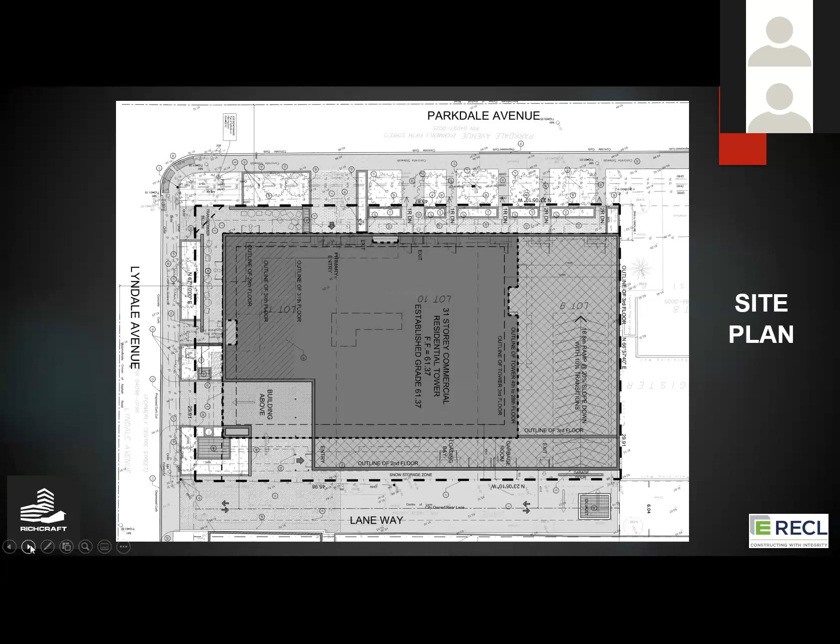So this is a picture of the site plan of the project. The laneway, the city laneway that's adjacent to the site between our site office on Lyndale and the project itself will serve as the access road into the project, into the parking garage access ramp and the 31-story tower. You can see the ramp, the retail spaces at the corner of Parkdale and Lyndale when I get to the ground floor plan.

There's the main lobby. There's also a lobby entrance off of Lyndale. There are some townhome units on the ground floor facing Parkdale. A relatively small footprint, but you can see the basic layout of the building.

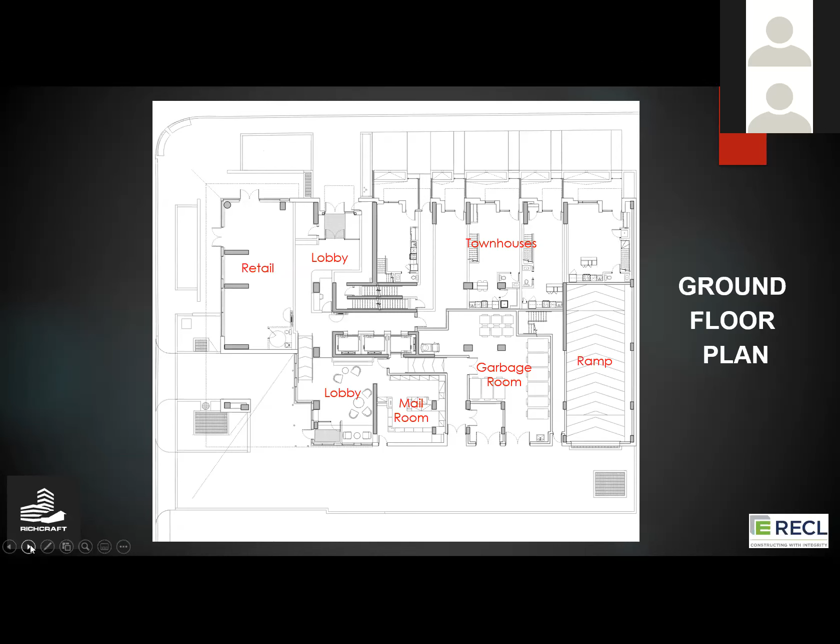We get to a typical floor. It's a mix of 1 and 2 bedroom units. Pretty typical layout, floor after floor as we go up through the building.

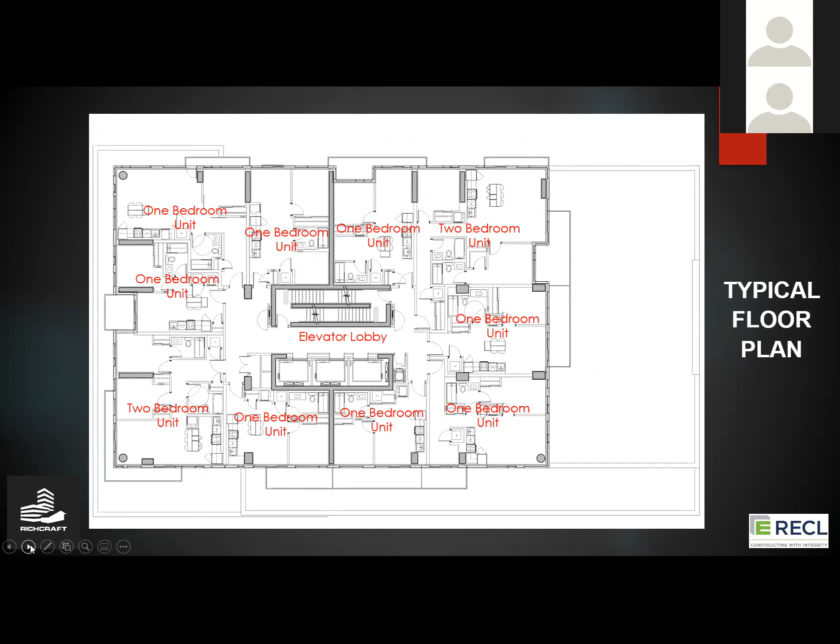These are the elevations of the building. Again, like I said, it's a relatively small footprint. I think it's a reasonably elegant looking building that'll blend well into the neighborhood.

So again, this PowerPoint presentation will be available through the councillor's office or directly from us for anybody who would like to have it on an ongoing basis. We'll be providing information on what we're building.

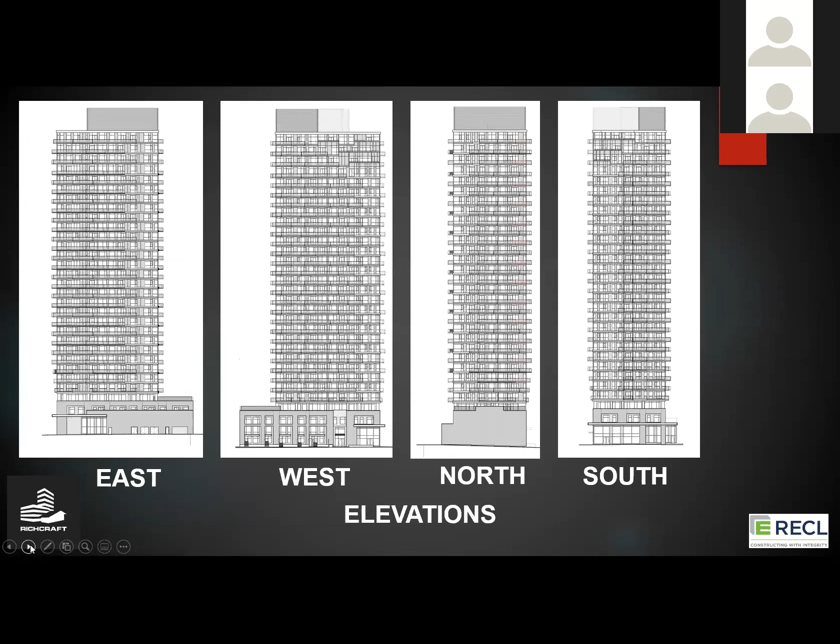Now, I want to deal with, because I think most importantly to most people here, is what's going to happen while we're building and what does construction look like.

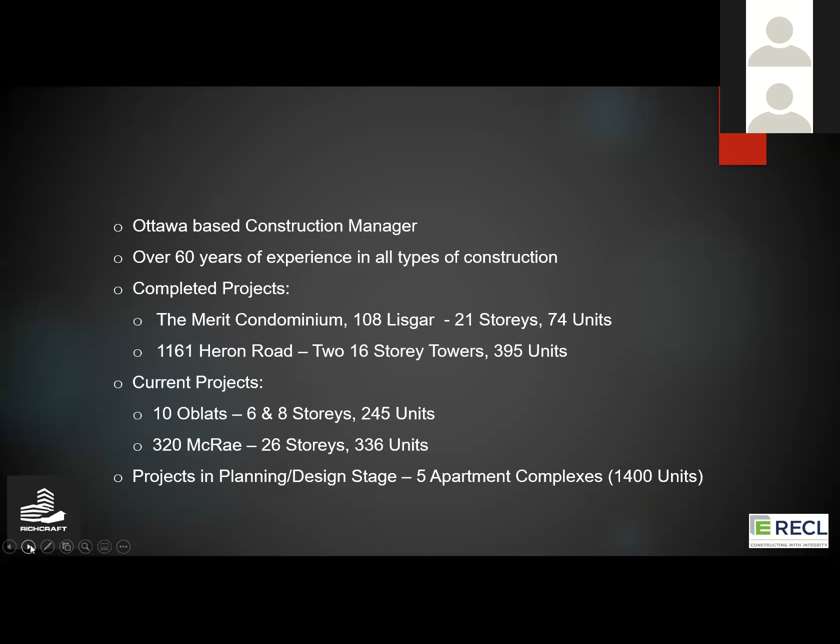First off, I just want to introduce our company, Ron Eastern Construction. We go by the acronym RECL. We were formerly Ron Engineering and Construction Eastern, so many people might know us as Ron Engineering. We rebranded in 2014. We're an Ottawa-based company, we only work in the Ottawa area now. Founded in 1958, 60 years of experience.

In the last period of time, we've developed a significant portfolio of residential high-rise projects. Starting earlier, from 2011 to 2013 we built, for Charlesford, the Merit Condominium on Lisgar. And we recently just finished 1161 Heron Road, which is 2 16-story towers, 395 units across from Canadian Tire at Heron and Bank. Ron and Bruce were both on that project and have come over to do this one.

Some of you in the neighborhood would also see us down the street across from Farm Boy at McRae and Scott. We've just started construction on a 336 unit, 26-story building with a 4-story podium and townhouse levels. We're in excavation mode there.

On Main Street at Oblats, we're building 6 and 8-story buildings for the regional group, 245 units. The first building will be ready for occupancy in November and the second one in April.

On top of what we're actively doing and what we've recently finished, we have 5 more buildings in planning and development stages, 1,400 total units. We anticipate that all of those units will be under construction by December of 2022.

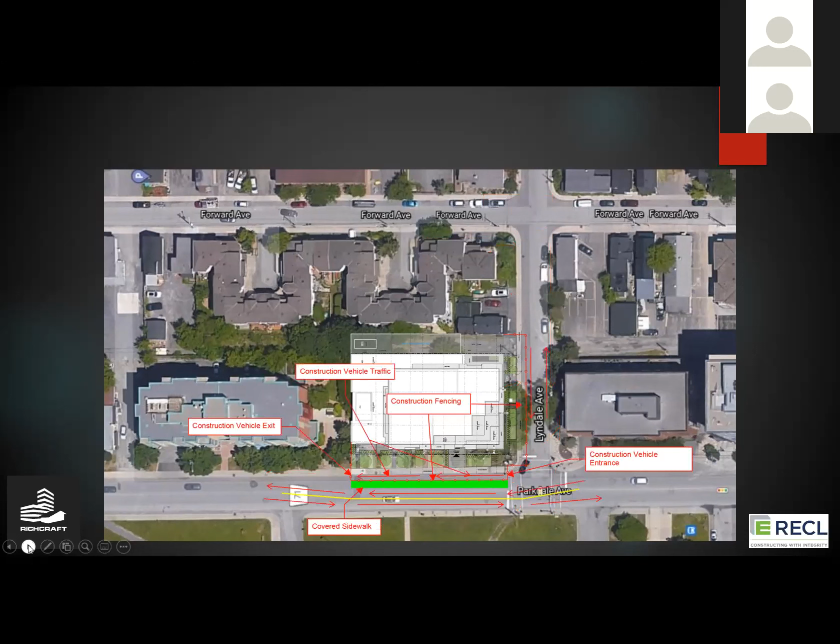So now we have the plan for when we are doing the shoring and excavation, the rock excavation, the blasting operation that we spoke about.

There is very little shoring required because the surface of the rock is so close to the surface. We are going to have a couple of dips and dives where we'll need it, but none of this will mean we need tiebacks onto private property. This will all be done by drilling and coring and placing piles, so we will prevent any use onto private property.

During the excavation through the site, you can see here I've labeled the construction vehicle entrance and exit. Through both of those are areas where I feel we're going to need a crossing guard, just because people and construction vehicles don't mix well together. So we need somebody out there to look after the pedestrians.

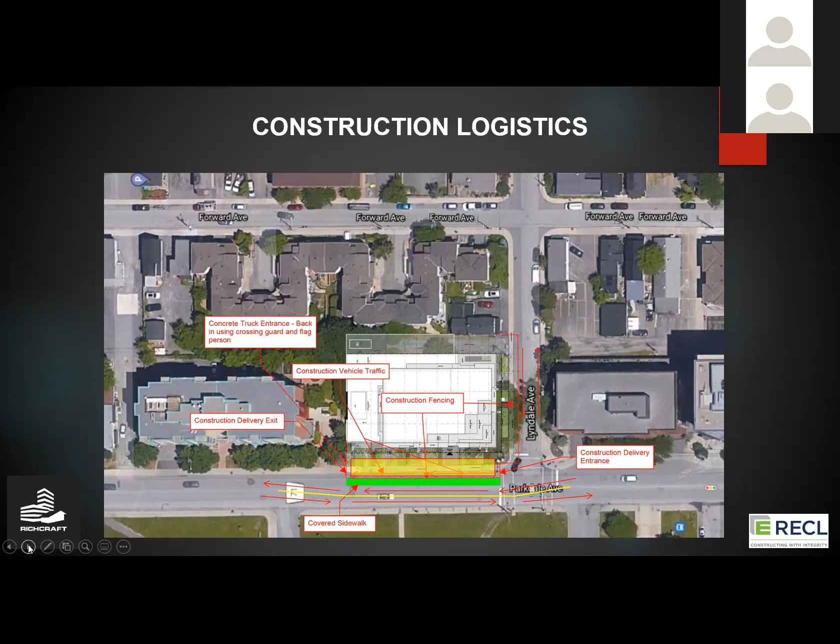Bruce, if you have anything to add, but nope, otherwise I think that's it. So we move to the next phase, which is after the excavation's done and we start a concrete operation.

Concrete operations can be very intense, especially when you've got a pour going on. The trucks are one right after another, the concrete trucks, they have to get in and out. Unfortunately, we cannot at that time do a drive-through site, because we will also have a concrete pump set up somewhere in that yellow shaded area.

At that time, we will be bringing the concrete trucks north on Parkdale and backing them in from the north side to the concrete pump. Again, very important that we have the proper signalmen and flagmen there to protect pedestrians and to stop vehicles when there are pedestrians around. So except for on pour days, we will still have a drive-through site.

That's very important to try and keep as much traffic as we can driving through. It's very dangerous on a construction site with vehicles backing up. So again, construction deliveries will be scheduled. We do not want to have construction delivery vehicles lining up down the street.

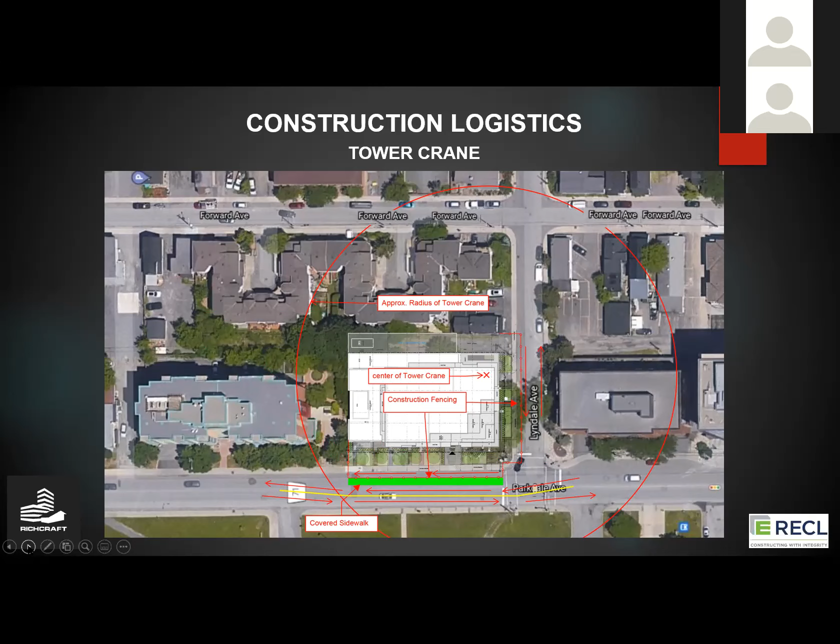I don't think I have anything else. I'm sure there's many questions. So, we arrive at that point. That was a brief walk through the logistics of construction, the team, the game plan, what we're building, and the timelines. The group as a whole here, the Richcraft people as well as our RECL people, are here to answer questions from the community. So Fiona, I'll turn it back to you to moderate those questions.

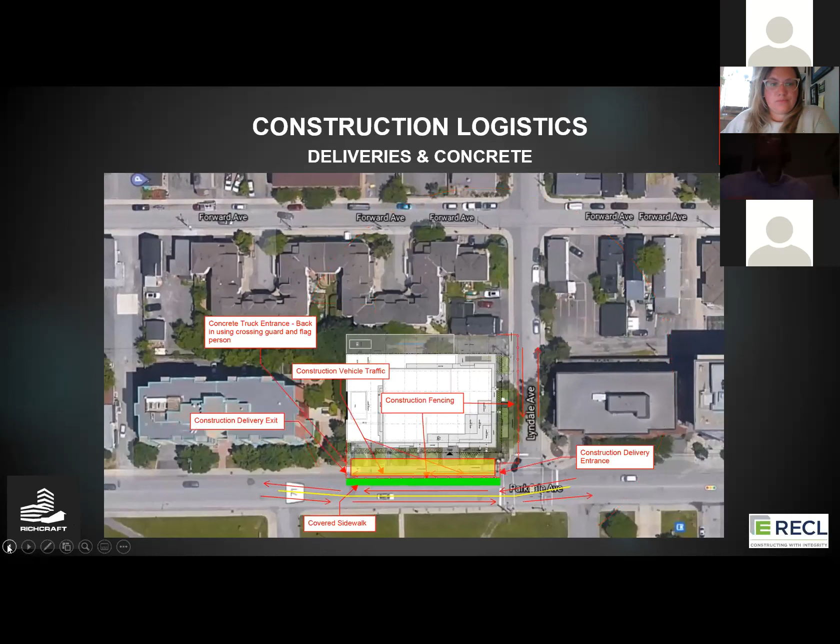Okay, fair enough. Yeah, thanks. Okay.